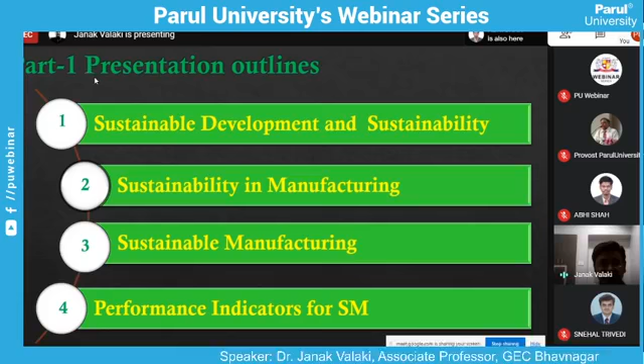Sustainable development is basically a word that evolved in the year 1987, in one of the reports submitted to the United Nations by Dr. Gro Harlem Brundtland. At that time she was the Prime Minister of Norway, and she contributed significantly in coming out with this milestone report, which was submitted to the United Nations by her committee, known as the Brundtland Commission report, titled Our Common Future. Since then, the word sustainable development has evolved and has been put into the knowledge of mankind, that everything we do has to be evaluated for its sustainability, or has to be sustainable.

So in that report, their prime responsibility was to introduce the word sustainable or sustainability and to make it understood, to frame it in such a way that even common people can understand the meaning of sustainable.

So from then onwards, the entire world had to frame their policies related to industrial development, social development, and other governmental policies, streamlined in the direction to make things more sustainable. So they came out with a definition of sustainable development as development that meets the

So many people have worked to frame the basic definition of sustainability, and one of the pioneering works in that area was by Dr. Dornfeld. He tried to frame the word sustainability as: sustainability means activities whose environmental impact is below the level that the self-recovery capability of the natural environment can deal with.

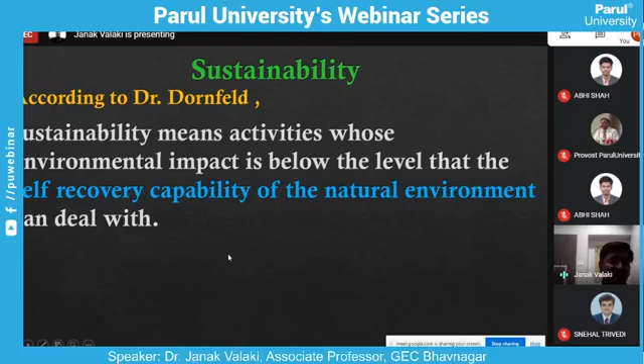This was one of the path-breaking definition framing works done by Dr. Dornfeld, who was heading the Laboratory of Manufacturing and Sustainability at University of California, Berkeley. Based on this framework, popular fields specifically in the area of manufacturing, which many of you might be aware of, have evolved.

The first is one of the important areas, life cycle analysis, popularly known as LCA. Then environmental impact analysis, eco indicators or eco analysis, green manufacturing, environmentally conscious manufacturing. We'll have a list of these words at a later stage. But all these fields have emerged based on this definition.

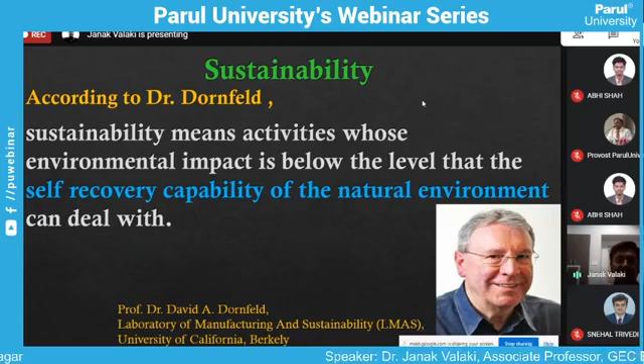So he has given an altogether new way to look at manufacturing activity, even though he gave this definition from the perspective of manufacturing in terms of utilizing resources. But the definition has become so popular that it has become generalized and can be adapted to even every field where human beings are involved.

Then again, he presented the idea that when we talk of sustainability, simply having the idea of sustainability is not enough. Now, sustainability of anything, any activity, has to be evaluated in a proper way. So this was altogether a new philosophy put forward by Dr. Dornfeld, apart from simply converting raw materials or resources into useful products and using them.

As a manufacturer, people used to put some amount into manufacturing products and selling at a bit higher price, so in between they were simply bothered about the amount of profit they could harness. So Dr. Dornfeld came out with another idea, another philosophy, which was very novel, or I would say unorthodox to manufacturing people. He said that every activity a human being performs has to be evaluated on three aspects.

The first is its environmental aspect, which affects the planet Earth. Then it has to be evaluated based on its economy, that is how much profit one is supposed to make out of it. And third is social, whether people are going to be affected, or up to what extent people are going to be affected, by performing that activity.

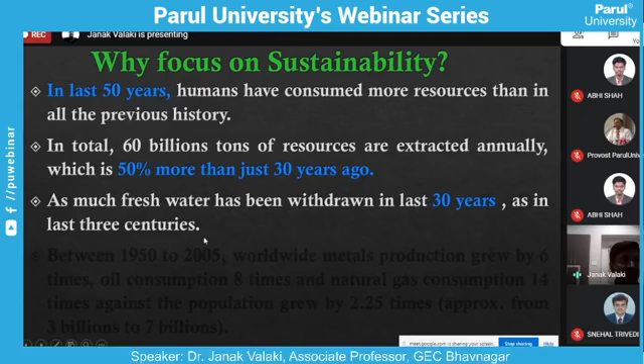And as much fresh water has been withdrawn in the last 30 years as in the last 3 centuries. That means the amount of fresh water used by mankind over the last 300 years has been used in just the last 30 years itself.

Between 1950 and 2005, that is during a period of 55 years, worldwide metal production grew by 6 times, oil consumption grew by 8 times, natural gas consumption grew by 14 times, against population growth of only 2.25 times. So you can see the difference - even though population has grown by only 2.25 times, the consumption of primary resources for mankind has grown many times or multiple times.

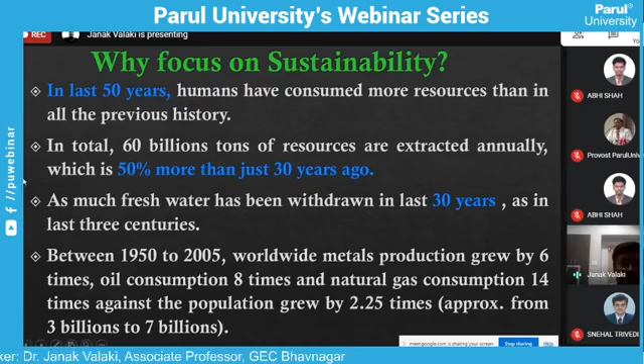This is one of the impetuses which has forced people, specifically in the academic field, to first educate common people and industrial persons, and start thinking in terms of devising or developing new philosophies of using resources, new technologies of managing, converting, or processing resources. So this was a brief idea, or eye-opening facts, which can be used to understand the requirement to focus on sustainability.

So when we are consuming resources, the resources must have been processed. Resources or some processes are used to convert that resources into usable products, and finally resources or products are to be used by the people.

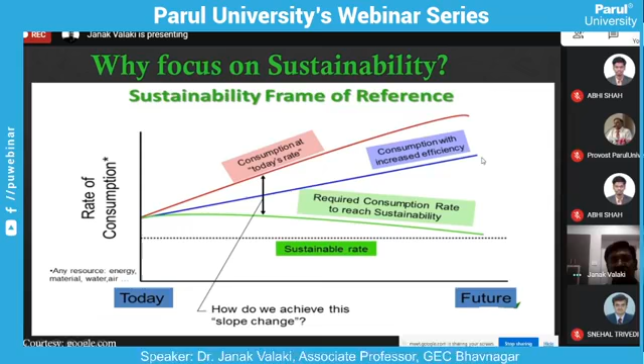As an engineer, our duty is to work towards using the resources which have already been consumed. So how can we use that? We can either reduce the amount of fresh raw materials or resources to be used. We can reuse the resources which have already been used. We can recycle the resources, or we can even remanufacture the products, refurbish the products, and so on.

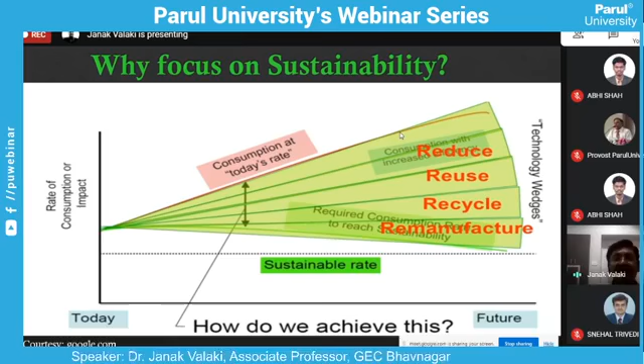So this is a broad idea about the number of approaches available, some of which we can think of to implement or practice. By working on them from many fronts, many dimensions, we will be in a position to shift this red line towards the green line, and ultimately fill this wedge, known as the sustainability wedge or technology wedge. In short, we need to fill this wedge by developing new technologies, by devising new methodologies to find alternate methods or alternate materials which are better in every aspect compared to the materials or methods currently being used.

Up till now, we have discussed sustainable development and how sustainable development has been carried into the dimension or area of sustainability. Now, why is sustainability important in manufacturing? That also needs to be understood. Why is sustainability important, or why does it need to be incorporated into manufacturing activities? That is the meaning.

We all know that manufacturing is one of the most resource-intensive, or resource-consuming, activities performed by mankind. When I say most resource-intensive processes, that means the amount of resources being used, consumed, or processed is largely through manufacturing only. The resources available in nature cannot be directly used by mankind in many cases; they have to be processed through various stages to make them usable, to make products which will finally be used by mankind. So it is one of the most resource-intensive processes, and the focus should be on the human activities which consume the maximum amount of resources.

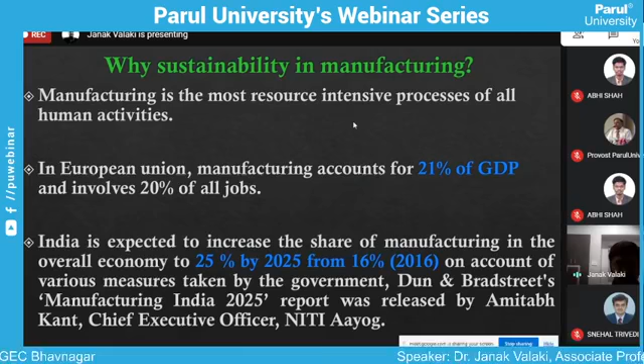These are some of the data which indicate how significant manufacturing is towards the global GDP. Some of this data is from the European Union. In the European Union, meaning entire Europe, manufacturing accounts for 21% of the GDP of the European nations, and accounts for almost 20% of all the jobs that have been created.

India is expected to increase the share of manufacturing in the overall economy to 25% by 2025, from the current 16%, on account of various measures taken by the government. This has been published in a report released by Niti Aayog of India. Currently, in 2020, it is nearly 18 to 18.5%. In 2016, manufacturing's contribution to India's GDP was 16%, and now it is 18 to 18.5%. The government is very optimistic about reaching 25% by 2025.

This is because manufacturing has been considered one of the most sustainable job creation areas. India, being a country of 135 crore people, has to find sustainable means of employment, and manufacturing is considered one of the best for creating jobs. The service sector is most vulnerable, as we witnessed during the corona pandemic, when many jobs related to service industries vanished. Jobs related to manufacturing were least affected. So the government's focus is to improve manufacturing activity and raise its overall contribution to GDP to 25% by 2025, which will contribute to sustainable employment creation. That was the basic underlying philosophy.

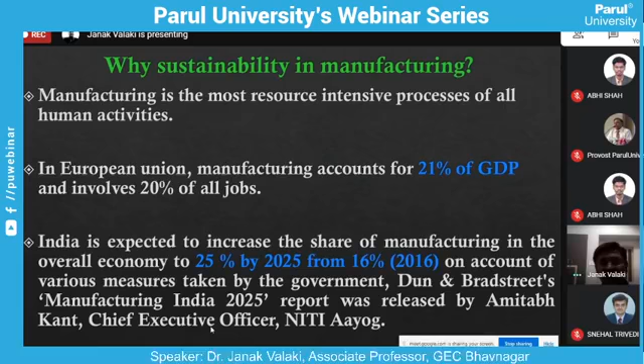Since then, Niti Aayog started focusing on this. They studied the developmental models of various countries for sustainable job creation and sustainable development, and came out with the report I showed earlier. During that period, from a contribution of 13%, it was projected that by 2025 we would take manufacturing's contribution from 13% to 25%.

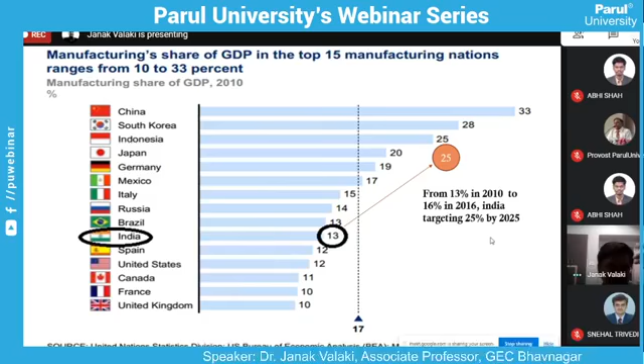So in 2016, India already replaced Brazil from its 6th position, and by 2025, India is expected to also replace Japan and reach the number 3 position. This is what is planned or projected, and based on the policies framed by the government, India is moving in that path within the anticipated or projected time frame. So India is surely going to be there.

Now the question is whether India will reach this position before 2025. There are all possible chances that India will reach the 3rd position before 2025 because of the new global dimensions or changed dimensions due to the corona pandemic.

India is going to be the next manufacturing hub of the world, as per even the UN's commission report, which was released in 2020. India is at the center stage of global leaders of manufacturing, and global majors of the manufacturing industry are all looking towards India. They are expecting India to perform better in terms of manufacturing, and that is why they are all planning to set up their manufacturing activities in India, which would augment India's speed to reach number 3.

It will also help achieve the target of reaching a $5 trillion economy by 2025 and an $8 trillion economy by 2030. Currently India is at nearly $2.4 to $2.35 trillion economy. So think of what amount of value would be added to the Indian economy, and majority of that would be through manufacturing activity.

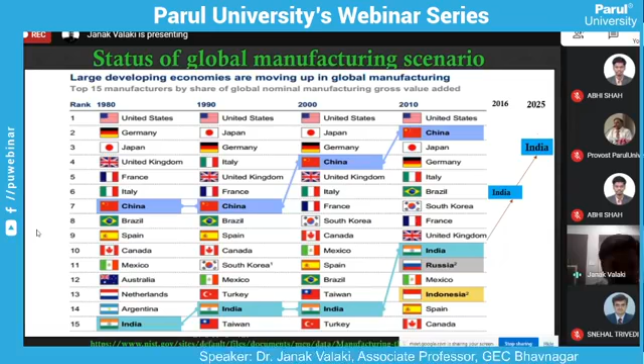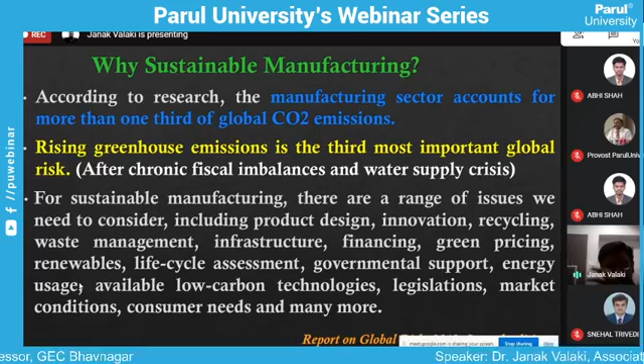Why sustainable manufacturing? We have already seen why sustainable development and sustainability are important, and what is sustainable manufacturing. But why sustainable? Why do we need to manufacture, or convert manufacturing into sustainable manufacturing, or why do we need to implement or incorporate sustainability aspects into manufacturing activities?

According to a global research study carried out, it has been found that the manufacturing sector accounts for more than 1/3 of global CO2 emissions. Manufacturing activities contribute to global CO2 emissions by more than 1/3, that is, more than 33% of CO2 emission is because of manufacturing activities.

Now why is this global CO2 emission important to consider at this moment? Rising greenhouse emission is the third most important global risk to mankind at present. It has been narrated in a report on global risk published in 2012, 7th edition, stating that rising greenhouse emission is the third most important global risk after chronic fiscal imbalances and a water supply crisis.

For sustainable manufacturing, there are a range of issues we need to consider, including product design, innovation, recycling, waste management, infrastructure, financing, green pricing, renewables, life cycle assessment, government support, energy usage, available low carbon technologies, legislations, market conditions, consumer needs, and many more.

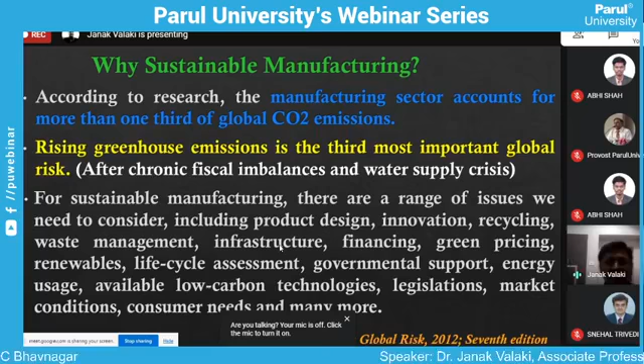Before we discuss sustainable manufacturing, let us get an idea about its basic meaning. We usually understand manufacturing as mechanical, physical, or chemical processes to modify geometry, properties, and appearance of a given starting material in making a finished part or product. It processes raw material or resource to change geometry, properties, or appearance, converting it into a final finished product. That is the basic engineering understanding of manufacturing.

Now, what is different about sustainable manufacturing from the conventional perspective? The meaning of sustainable manufacturing is the creation of manufactured products using processes that are non-polluting, conserve energy and natural resources, and are economically sound and safe for employees, communities, and consumers. So sustainable manufacturing means doing all these things without polluting the environment, using minimum energy and resources, while also being economical for employees, communities, and consumers.

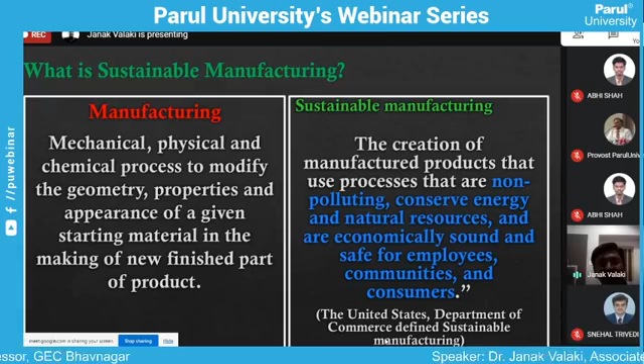We still have to perform all these activities to convert raw materials or resources into finished products, but whatever we do must be approached differently. We must find new technologies that emit minimum emissions, consume minimum energy, utilize minimum resources, and ultimately result in low cost production of the final product. Doing this exercise from this different perspective is known as sustainable manufacturing. This broad understanding was presented by the United States Department of Commerce, who initially defined sustainable manufacturing to the commercial sector.

Another perspective: sustainable manufacturing processes are those which generate minimum quantity of waste, demonstrating improved environmental performance and energy efficiency while providing operational safety and personal health. So to make a manufacturing process sustainable, it has to generate minimum waste, show improved environmental performance, consume energy with high efficiency, and provide safety to operators.

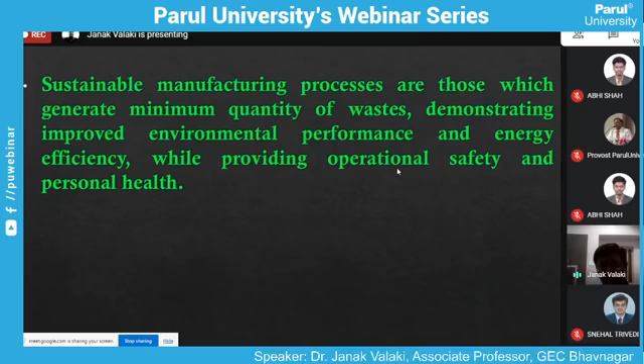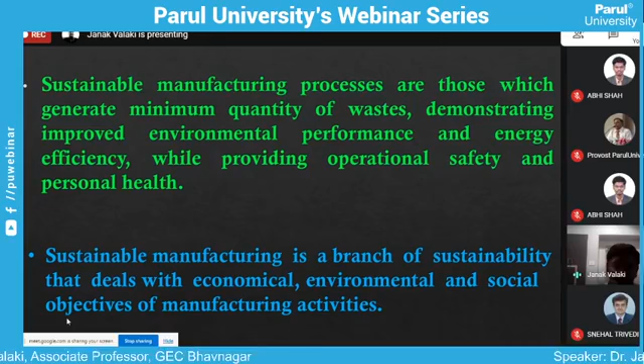Another way of looking at sustainable manufacturing is that it is a branch of sustainability dealing with the economic, environmental, and social objectives of manufacturing activity - the three pillars of sustainability. When we evaluate manufacturing activity from these three pillars' perspective and make it an objective, that activity is considered sustainable manufacturing.

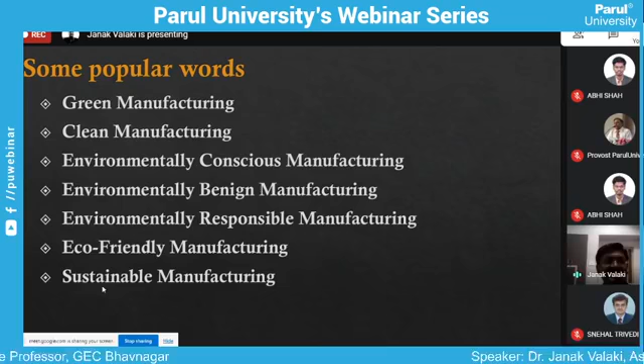Sustainable manufacturing has become a common word, but other terms are also popular among engineering people: green manufacturing, clean manufacturing, environmentally conscious manufacturing, environmentally benign manufacturing, environmentally responsible manufacturing, eco-friendly manufacturing, sustainable manufacturing. All these words have specific objectives dealing with manufacturing, but overall they fall under the broad umbrella of sustainable manufacturing.

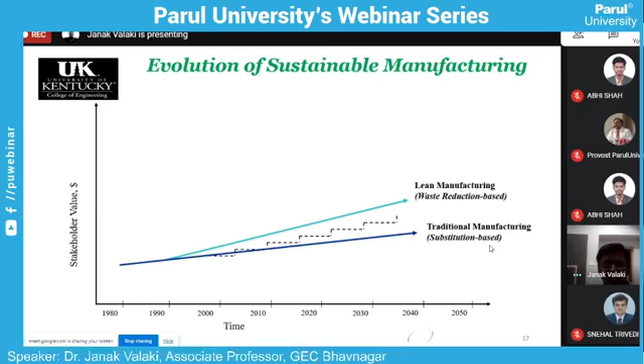Then another concept evolved, known as lean manufacturing, which means focusing on minimizing waste generation from manufacturing activity. If we had implemented lean manufacturing, the rate of value creation would have increased up to a higher point. Moving from traditional manufacturing towards lean manufacturing surely increases value creation or value addition.

Instead of lean, another area is green manufacturing. In lean manufacturing the emphasis is on waste reduction, while in green manufacturing, apart from waste minimization being inherent, additional strategies are used to ensure environmentally benign or friendly activity - popularly known as 3R based technology, called green manufacturing. So when we implement the green manufacturing approach, it has the potential to add even more value to the products.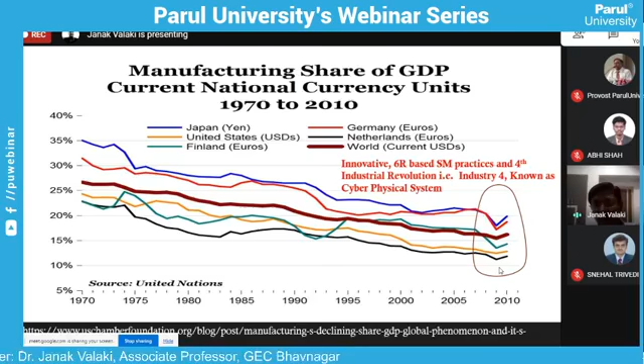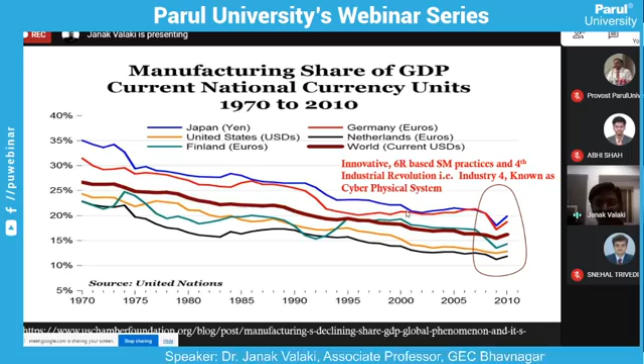You can see a drastic change from nearly 2010 onwards in the share of manufacturing in individual countries' GDP. That has been possible through the popularization of the 6R based technology or philosophy, and also with the commencement of Industry 4.0, the fourth industrial revolution, known as cyber physical system, which is basically known as smart systems for manufacturing.

So, sustainable manufacturing. I hope that many of you would have seen this face earlier. He is known as the father of sustainable manufacturing philosophy, and he educated the world about sustainable manufacturing. He contributed significantly to educate manufacturing people about the meaning of sustainable manufacturing, and he worked significantly to teach people how to ensure sustainable manufacturing.

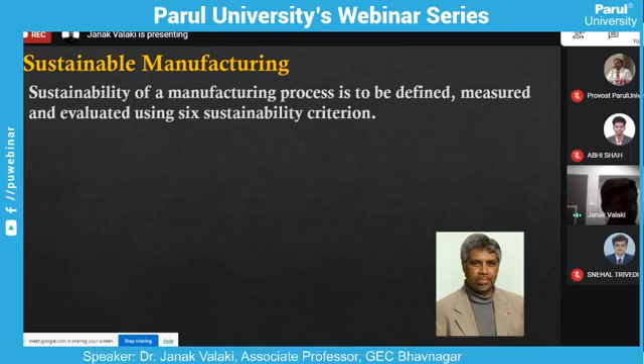The earlier people, they simply came forward with the philosophy. Now, this person did work to implement that philosophy onto the shop floor. And he is Dr. I.S. Jawahir from University of Kentucky, US.

And he came out with the idea of evaluating or measuring sustainability of the manufacturing process. Until we are in a position to measure the current status of the activity, we cannot say which activity is to be prioritized and how to measure sustainability. Until his contribution to manufacturing, sustainability was mainly limited as, or was used as, an abstract word, even though it has got broad meanings, but nobody was knowing how to evaluate or measure sustainability.

It was basically a qualitative sort of idea or philosophy, where people simply can say that sustainability has improved or decreased, or how sustainable one process is compared to another one. That's it. But he presented to the world how we can actually form an index, or how we can quantify the sustainable activity or sustainability of a process.

And he came out with the idea that sustainability of a manufacturing process is to be defined, measured, and evaluated using 6 sustainability criteria, or sustainability evaluation/measurement criteria. The individual criteria are to be measured from the data collected, and from that we can find the index for individual criteria, and we can find a cumulative index, known as the sustainability index. These 6 criteria are manufacturing cost, energy consumption, waste management, operational safety, personnel health, and environmental impact.

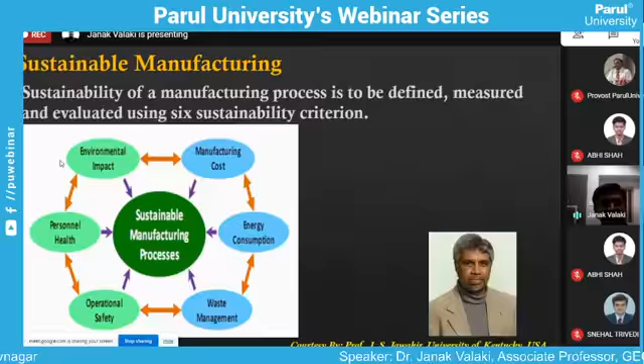These are the 6 criteria given by him: minimize manufacturing costs and so on. This is the main or basic objective of sustainability in any manufacturing activity.

Now, based on these 6 indicators, each individual indicator is so broad and so deep that we need to work significantly to identify the individual index. Say, for example, economic performance. Whatever activity we have taken for sustainability assessment has to be first assessed on the basis of 3 pillars: economic, social, and environmental.

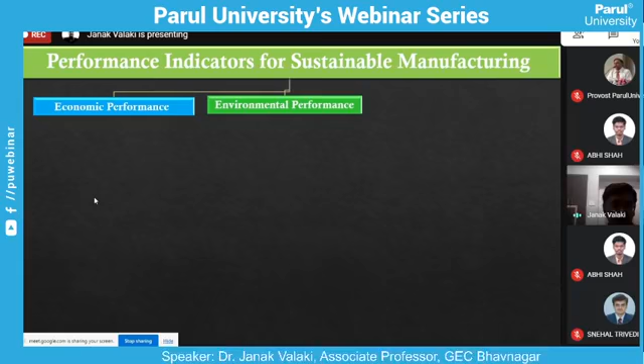So when we want to evaluate or assess any process from an economic performance point of view, what can we do? These are some of the measures we can use to check, investigate, or evaluate the economic performance of a manufacturing process: manufacturing cost, energy cost, quality of the product, production efficiency and productivity, technology level employed, and how efficient the supply chain network of the organization is. All this will contribute to the revenue generation of the organization, and through a revenue generation model, one can find the economic performance of that process.

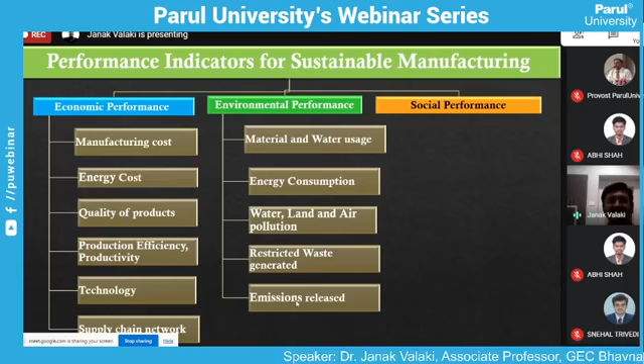When sustainability is to be evaluated from an environmental performance point of view, the indicators available to help us assess performance are material and water usage for carrying out the activity, amount of energy consumption, water, land and air pollution caused by the activity, restricted waste generated as per occupational health standards, and amount of toxic emissions released. All these performance indicators help us calculate or measure the environmental performance of the process at hand.

Social performance also needs to be evaluated. The indicators used to assess social performance of a process are health of the personnel, happiness level, education level of the personnel involved, poverty level, and standard of living. All these are performance indicators to measure social performance of a manufacturing activity, termed as performance indicators to measure the sustainability index.

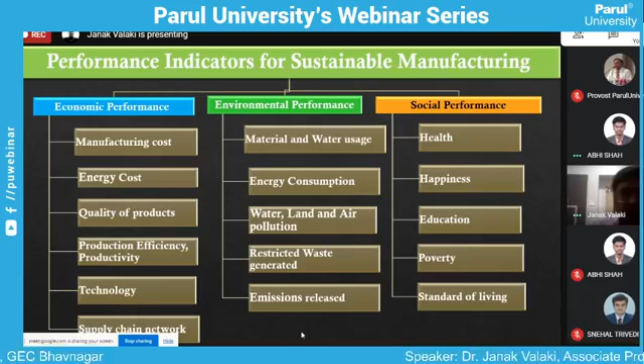I hope I have made it clear to everyone. Yes sir, yes sir, it's clear. Okay sir, yes, I'm unable to change the slide. Okay sir. Yeah.

For cost, going deep into the individual performance indicator, say for economic performance, we have to calculate the cost associated with it. Within the cost element there are a number of sub-cost elements we need to measure, like labor cost, cost of consumables, cost of energy, maintenance cost, cost of byproduct or product treatment, and indirect labor cost, apart from other sub-elements. The intention is to make you aware of the various cost elements that need to be measured, which will ultimately be used to measure the economic performance of a particular activity.

Similarly, energy consumption is also to be calculated: inline energy consumption for maintaining facilities and facility environment, energy consumption in transportation in and out of the line, and ratio of use of renewable energy. These are some indicators used to measure total energy consumption in carrying out all activities, which will ultimately be used to assess the environmental performance of the process.

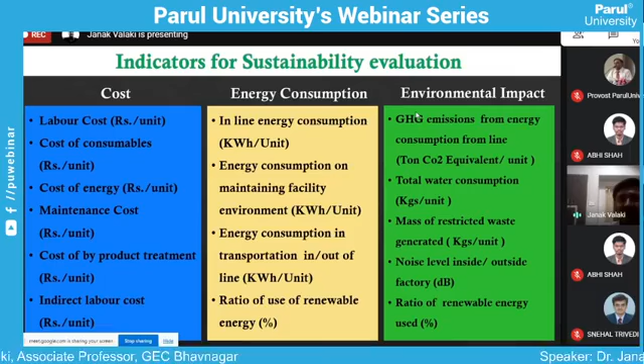Then operator safety: exposure to corrosive and toxic chemicals, exposure to high energy environments, and injury rate of the workers or personnel. These are the indicators used to assess the operator safety level or operator safety index of a process.

Then personnel health: chemical contamination of the working environment, mist or dust level, noise level, physical load index, or health related absenteeism rate. These are some indicators used to assess the personnel health index of a process.

Then waste management: mass of disposed consumables, consumable reuse ratio, mass of mist generation, mass of disposed chips and scrap generated, and ratio of recycled chips and scraps generated. These indicators help find the waste management index, and all these individual indexes, when evaluated cumulatively, give us a sustainability index of a manufacturing process, based on which we can assess the performance of a manufacturing process on the sustainability front.

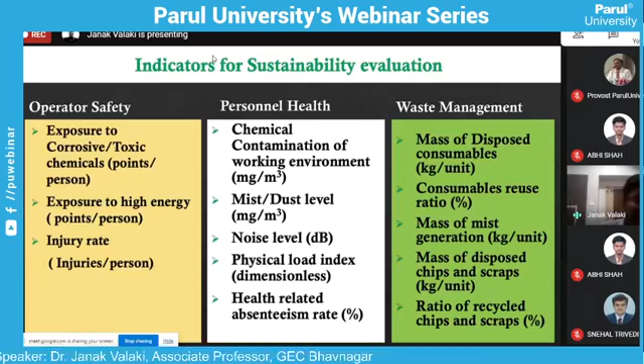Now we have understood sustainable development, sustainability in manufacturing, and sustainable manufacturing. We have also had an idea about how sustainability is to be evaluated, the indicators used, and the key performance indicators through which we can measure individual indexes for sustainability and an overall sustainability index. Now, ultimately, how to implement it.

There are basically five broad technological approaches through which we can implement sustainable manufacturing. These approaches help us prioritize the activities to focus upon, ranging from something as simple as doing housekeeping activities on the shop floor in the best possible way, to something as difficult as coming out with an altogether new product design.

There are simplest approaches, very simple approaches to implement sustainable manufacturing practices in a shop floor or in an organization. And there are technically or technologically absolutely difficult approaches also available, wherein altogether products are to be designed from new philosophies. So the first is housekeeping, improving housekeeping activities within the organization, which is a very easy approach to start with.

Compared to housekeeping, the difficult approach is process optimization. Whatever activities or processes are being followed in the organization, one needs to optimize all those processes, from minimization of resources used, minimization of energy consumption, minimization of water, or minimization of all the resources. When I say process optimization, I mean minimizing resource consumption at each and every stage of that process. That is comparatively a bit more difficult stage or approach compared to simply housekeeping.

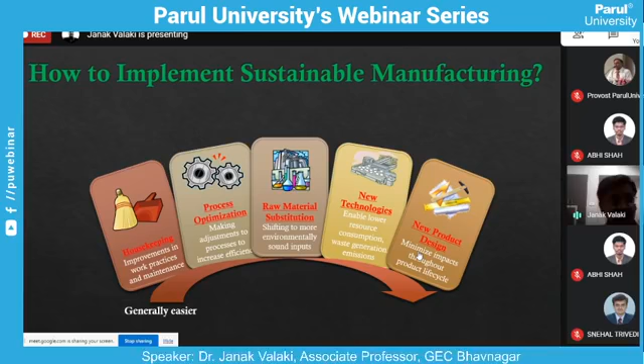Again, a bit more difficult approach to implement sustainable manufacturing is identifying new technologies which will ensure minimum resource utilization or consumption, identifying or developing new technologies. And the most difficult is developing new products, or developing products with an altogether new philosophy, new product design approaches. This is the most difficult approach of implementing sustainable manufacturing.

This was again given in one of the United Nations reports, these approaches. So these are the 5 approaches to deal with or implement sustainable manufacturing.

So when one wants to convert existing manufacturing activities into sustainable manufacturing, depending upon what level of improvement one is looking for, and what amount of investment one is capable of doing in these activities, one has the simplest possible options: to improve housekeeping activities of the shop floor or organization, or adopt and implement new technologies, and even improve or develop new product designs.

So whatever is suitable to an individual organization's capability, they can look for a possible approach. One can start with one approach and move to another, or start working on all the approaches individually as well as simultaneously. This is the flexibility available. But working on even an individual approach is also called practicing or implementing sustainable manufacturing.

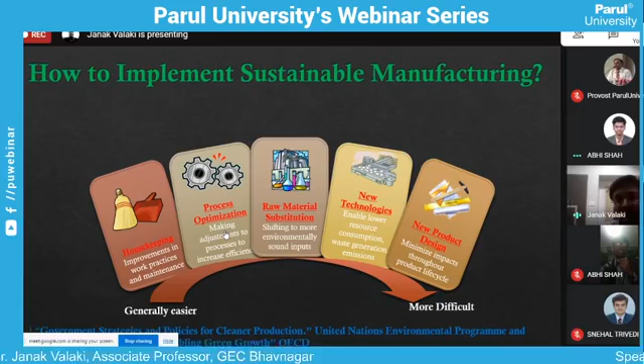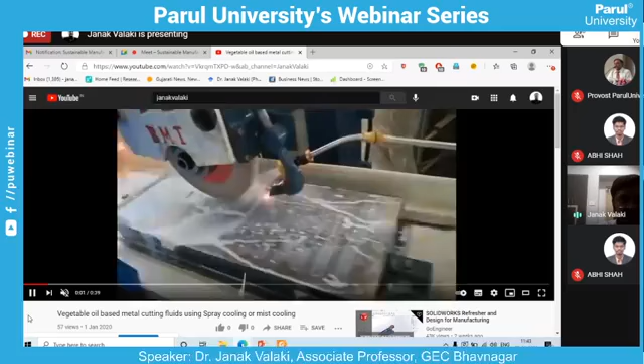Okay, so before I end this session, I would like to show you a few videos related to my work. I have developed a technology, and my work has been published in renowned journals - Springer, Taylor Francis, Sage. This is one of the videos wherein I developed a new technology, and the paper has been published as a book chapter in an Elsevier book. This is a spray cooling or mist cooling approach for the surface grinding process.

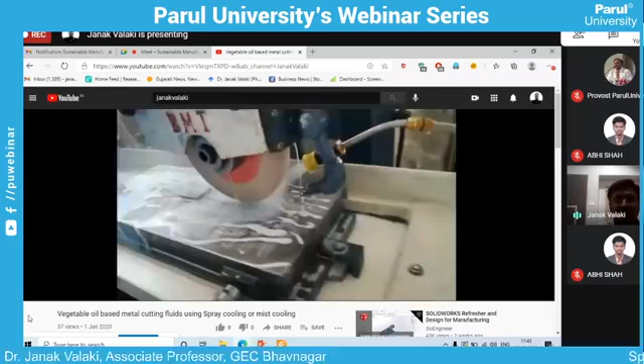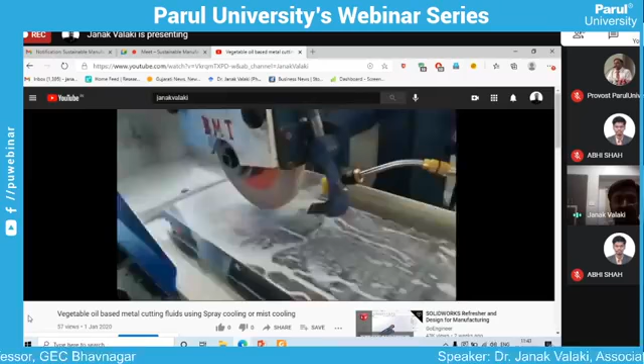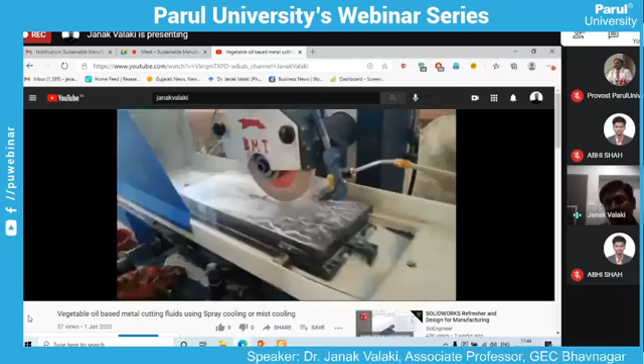The conventional method of applying cutting fluid is flood cooling, as grinding is the most energy intensive process compared to all manufacturing processes, consuming more than 50 times the energy compared to its counterpart finishing process. Cutting fluid contributes the highest to non-sustainability of a manufacturing process, so the focus was to develop new technology to minimize the amount of cutting fluid usage.

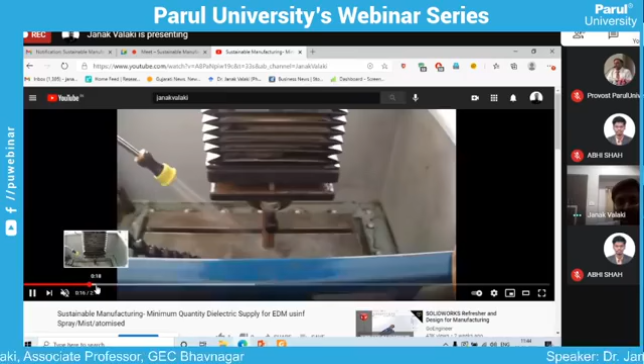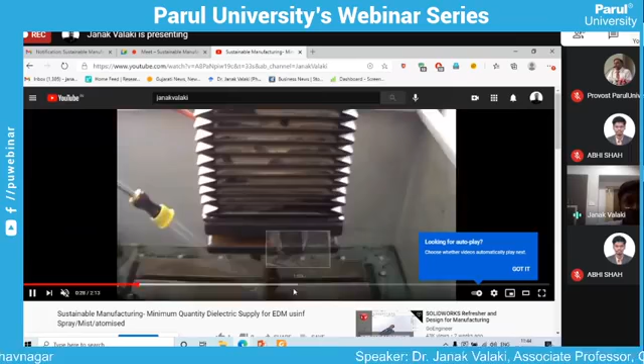I have also used the same technology for EDM process, electric discharge machining, where the intention was to minimize the amount of dielectric fluid required. EDM is a process wherein the workpiece is submerged into a fluid, so at a time more than 100 liters of dielectric fluid is used. Instead of that, I have used a technology which utilizes high pressure spraying of a minimum quantity of dielectric fluid.

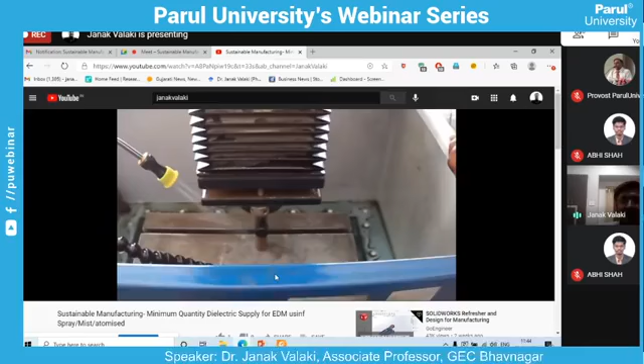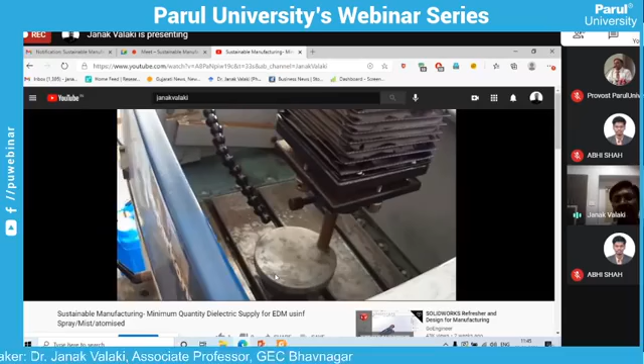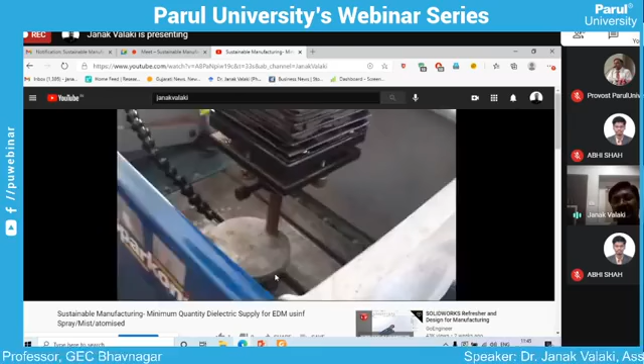There is a concept called MQL, minimum quantity lubrication or minimum quantity fluid, but this is in between minimum quantity and conventional fluid - the amount used is higher than the minimum MQL concept. So it is spray supply or mist supply. Another concept is misting or atomizing - high pressure with minimum droplet size, that is misting or atomization.

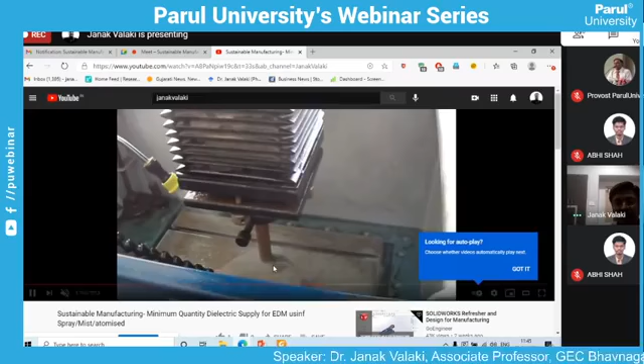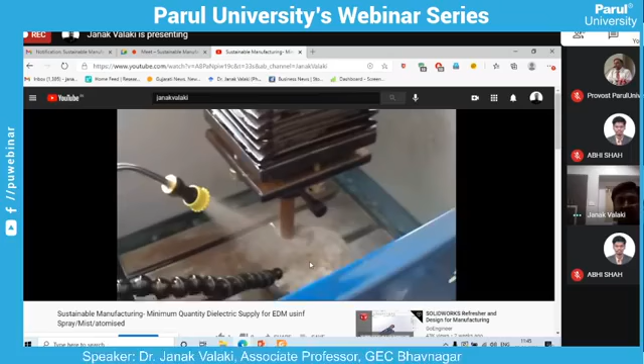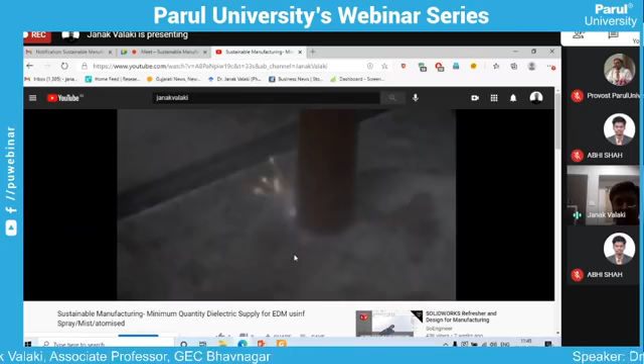All these projects have resulted in much better improvement in terms of manufacturing indicators. The results in terms of material removal rate, surface finish, surface hardness, and all other metallurgical aspects have improved drastically compared to conventional means. My papers are already available on web media, and one can see videos of my work on YouTube on my channel. If one is interested, they can have a look at all this.

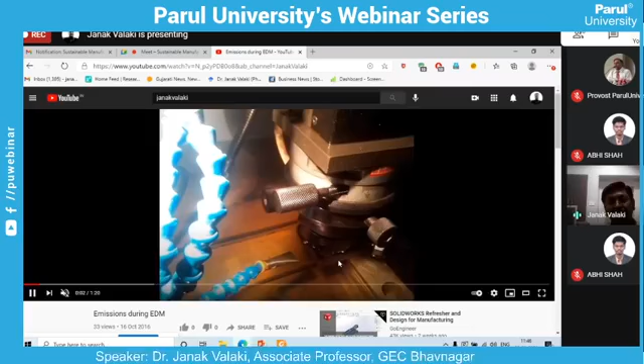So I worked on Jatropha biodiesel, Castor biodiesel. I'm also working on measuring the emission products from various manufacturing processes, quantifying the toxicity or hazardousness of various emissions.